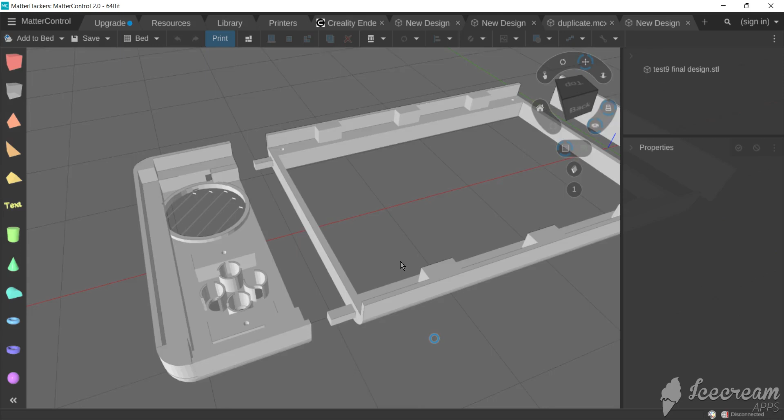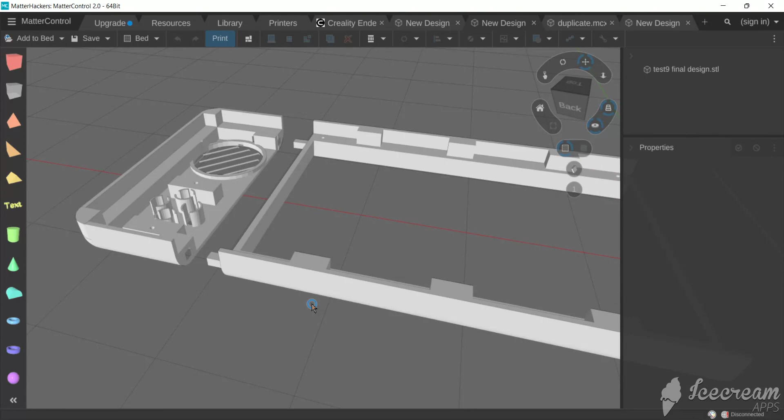All right, this is the current version of the gamepad. If you can imagine this being the front of it right here, and imagine this piece right here mirrored on the right side as well. So it's going to print off in 6 different pieces, 3 for the front, 3 for the back, just because of size constraints on the print bed itself. Just can't fit the entire thing all at once. Unfortunate, is what it is, not too worried about it.

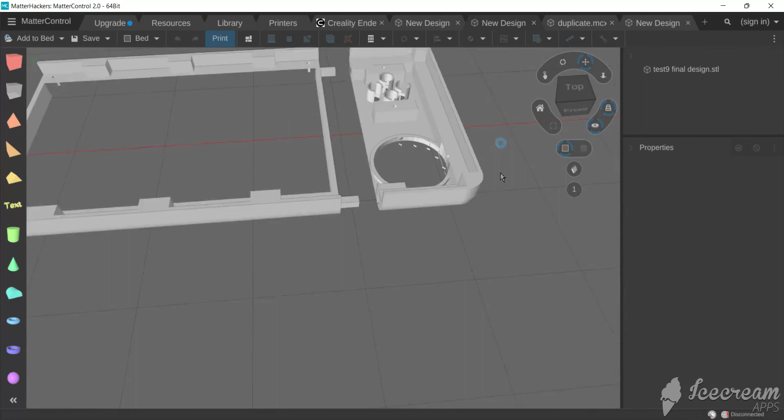We'll connect pretty basically, that through that, even a little air gap right there for the air, so it's not getting trapped. Then yes, I'll probably also add a little hole here and here so you can screw it in. That way it's just more secure. Not going to fall apart as easily. What else? We got speakers on the left and the right side right here with those slots right there. The gamepad will be right here, and then that'll look like this from Adafruit.

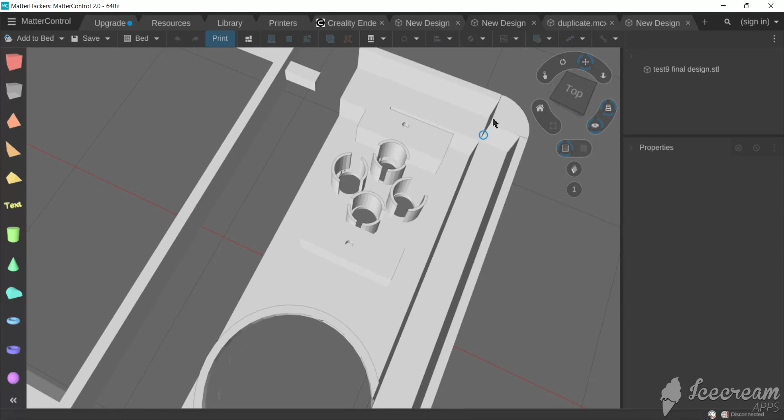Pretty straightforward. And then I do need to design the shoulder button still. But I think if I just print these 2 pieces off right here, that one and that one, separately and then add a little spring at the bottom and a board so it doesn't fall off, it should function well enough as a button. I need to figure that out still, but that should work.

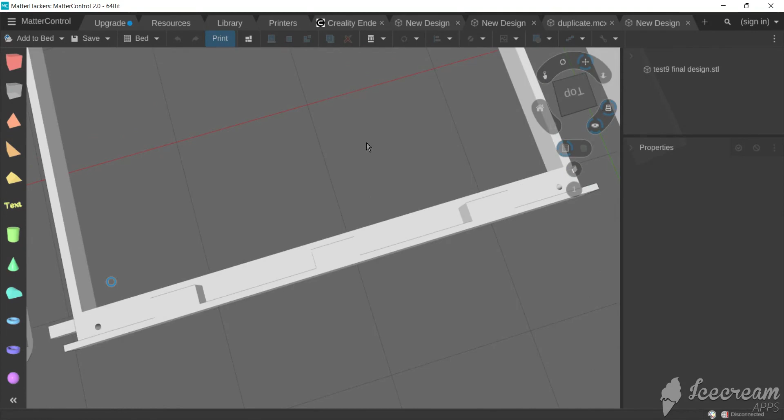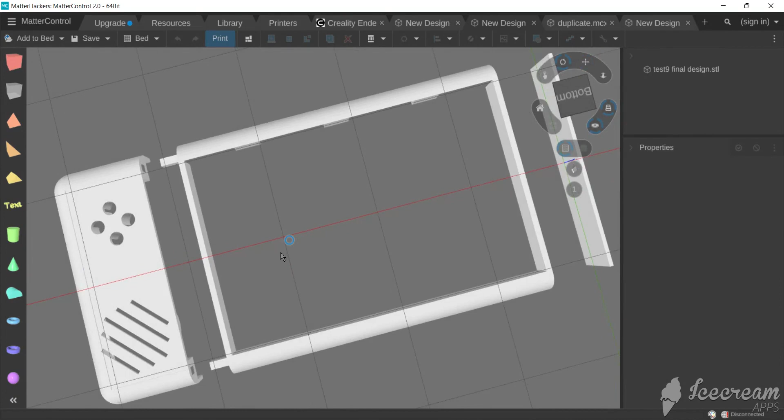The screen itself is going to fall in place right in here. So this looks similar enough to the one that I bought. It's probably not the exact version, but it looks close enough. If you can imagine that flipping over on its side, that'll fall in here, screen facing out this way, and voila, you've got your game case. The backside is more complicated. It's housing a lot more of the different electronics boards.

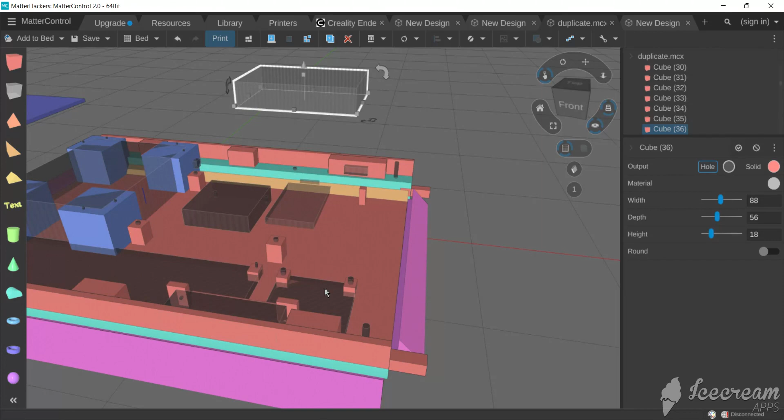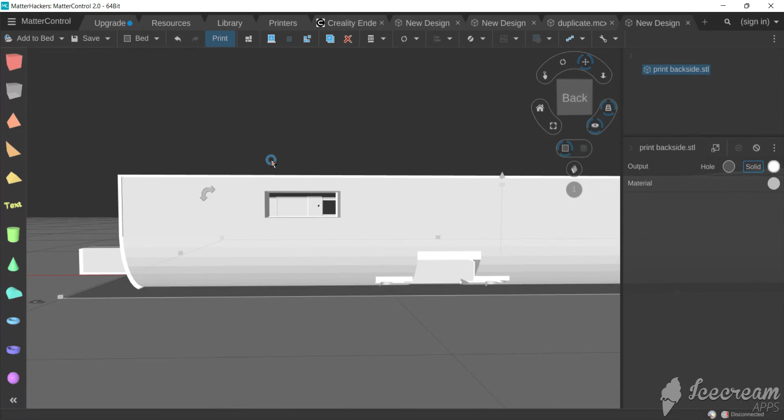So for example, you've got the audio amplifier, which will be right here. It's going to plug into the Pi board, which sits right up here. And that'll branch out to different speakers and also to the slide potentiometer, which is going to sit right there. That's just for volume control. The power switch or button, I'm not sure which one to do yet. Button is probably easier, but switch is more Nintendo DS-like, if that makes sense. So yeah, that'll fit in right there.

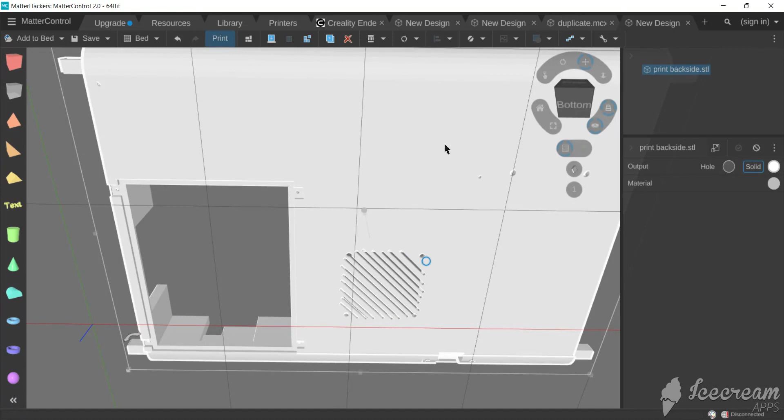And then the fan will go right here. Might be too small, not too sure. I'm worried that with the case this large and the fan only that size, the boards might begin to overheat, and that does cause me some concern. But the only way to find out is to actually try it out. But I will be adding more areas like these for airflow.

This was going to be the battery place. If you can imagine, it would have fit in right here where you see this grayed out box, and then there would have been a cover for the back of it, and a separate cover for the back side right here, the back side of the back side, that would have screwed in. However, that did not work.

The current power boost board I had for it only outputs, I think, like an amp, and the board itself needs 3 amps. And there's also the screen to think about, so 1 amp would just be ridiculously shortchanging it. It just wouldn't work. So I'm working through a few ideas on how to fix that, but it is what it is.

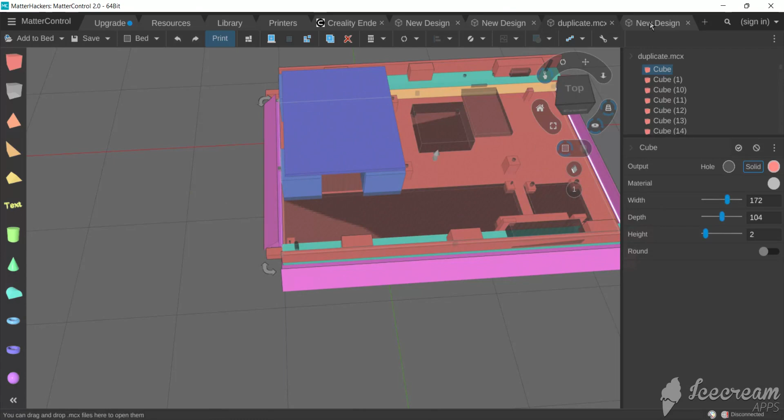And I think that's all of it. Yeah. That would have been the power boost board right there. You would have charged it with micro USB, but again, that's no longer the plan. It's currently on the back burner. So yeah, it's come together slowly but surely. Well, that's all.